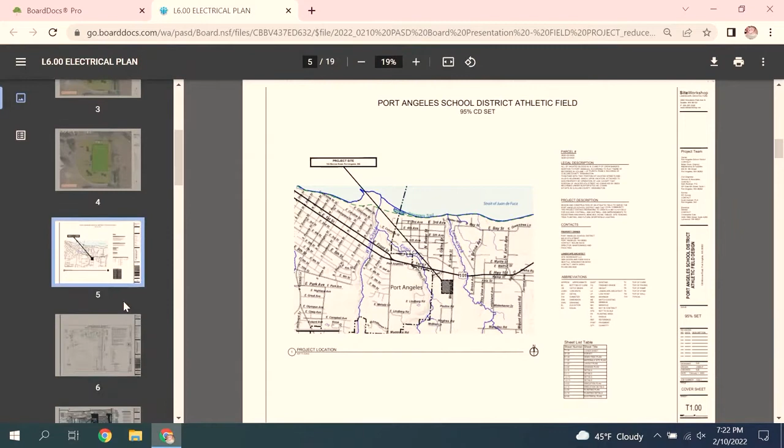The second page is the site survey. This survey was conducted by a firm local here to Port Angeles, NTI Survey, and we use this as the basis for developing our construction documents.

The third sheet in the set is the demolition plan. Just some elements I wanted to point out to you on this sheet is that the hatch area you see here with this diagonal hatch, this will be demolished. It's the existing and former Monroe School drop-off, but we are realigning the new walkway path in the same alignment within this to keep that historical arrangement on site. All of these existing trees that were part of that drop-off loop will be preserved and retained, as well as this existing historic Monroe School sidewalk leading up to that former drop-off loop.

Most of the other trees actually will be preserved as well, including that stand that's over by Roosevelt on the northwest corner of the site. There are 2 evergreen trees right here. I believe my mouse is following okay. These will be demolished just because they're at the edge of the new field. And there's another few small trees, but we are retaining a very significant deciduous tree that's planted in a prominent location on the site as well.

The ecology blocks you see out there, all the old remnants of utilities and things like that, will all be demoed and removed as a part of this site, and it's called out to do so on this plan. Around the portable building, the portable that you know exists out there will be retained, but the playground to the south of it will be removed, as will that small storage shed.

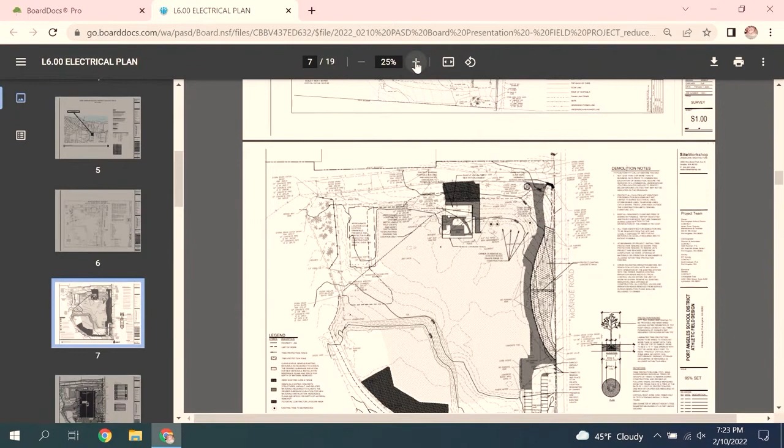And again, the diagonal hatch indicates what's removed, so some of the asphalt walk will be removed, but there will be asphalt retained to provide access to the ramp in the rear of the portable and to the stairs on the side of the portable.

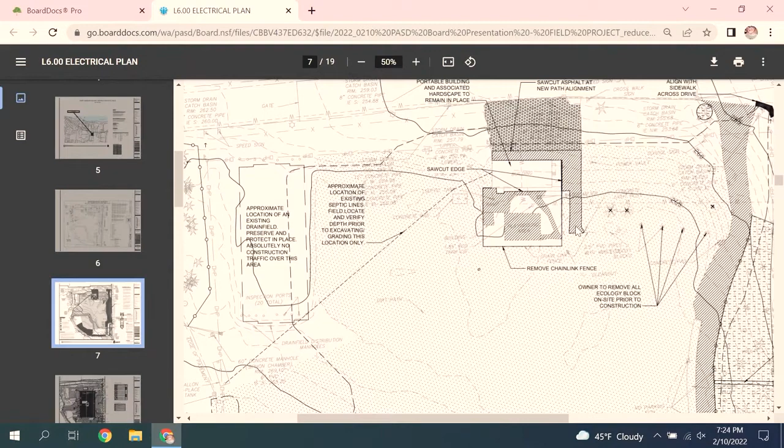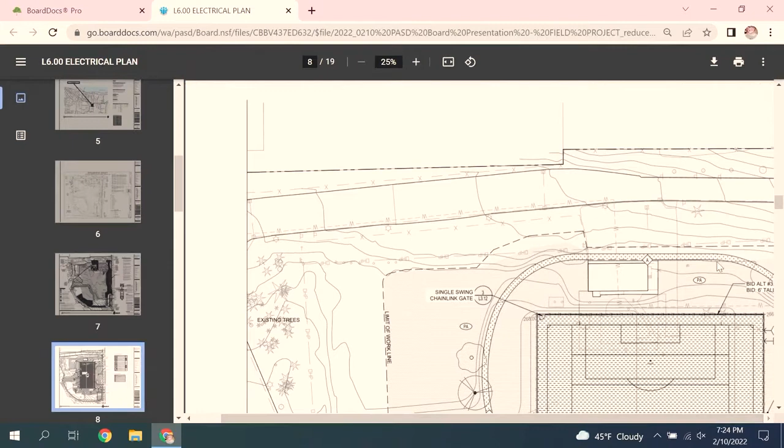The next sheet in the drawing set is the layout plan. And it just came on right there. A lot of this we had covered in the description of the plan, but in brief recap, the main elements are a full-size soccer football field, and you can see that in the center of the screen, kind of centered on the site and somewhat centered, as close as we could get, on the historical alignment of the former Monroe School. On the field, too, since the last meeting, we incorporated a logo that will be a part of the turf. It's the Port Angeles School logo, a large P and A.

I think these letters are about 20 feet tall, but laid horizontally down on the turf, integral to the turf. So the P and the A will be green with a white, thick outline around it. And it's oriented the way that you see it on the plan, so that it's easily viewed from the bleachers, which will be kind of the main viewing area, and also from this hillside informal amphitheater, kind of the right orientation to look down on the field and see the PA as well.

Beyond the field is this nice ADA accessible 6 foot wide asphalt walking path, and ADA accessible, so it does not exceed 5% slope in any part of the path, which makes it ideal for strollers and roller skates, and most importantly wheelchairs to traverse around the entire area. There's 3 locations of curb cuts or at-grade connections down to the street level, essentially right here with a tactile warning strip across from the existing sidewalk.

Over here on the south end, got a little bit of a lag, but on the south end as well, there will be a curb ramp, we call it, or a curb cut, and then also on the Roosevelt side, leading to that playground, there will be a curb cut as well. So it'll be fully accessible onto and off of and all the way around the walk. The bleacher area, we mentioned that location, and there's some areas of future development that I think I will cover in a subsequent sheet.

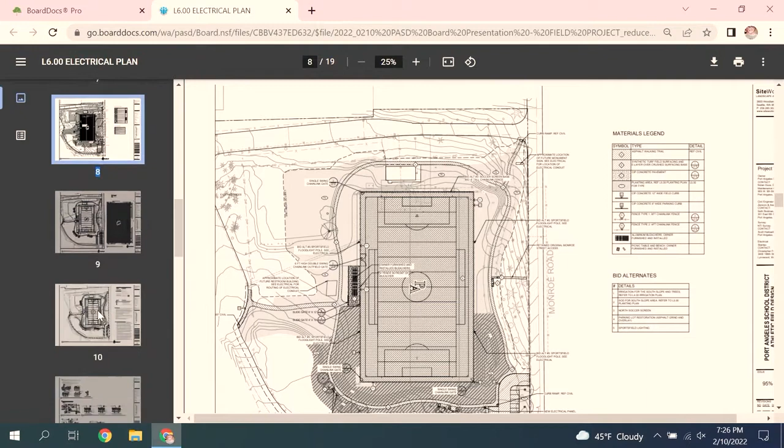And then the sheet that follows that one is the grading and drainage plan, and this will be a little bit more refined for the final bid set, but this is a good sheet to show kind of where the significant amount of grading occurs on site. One of the locations is this front entry. You kind of see all the darker contour lines on here. Those indicate how the path will be laid back to create that more gradual slope up. So there will be a little bit of a proud hill at this location as the path kind of cuts along and up into the site both ways.

There will be some grading between the soccer field and the portable building that's there now, some steeper grading, but it's still 3-to-1, perfectly mowable, but just to make it work and match up to the existing grades around the portable. That'll occur here. We mentioned the grading that gets pulled back to create this warm-up space area.

And then as we move south, the most extensive grading on site will be to remove this knoll that sticks out onto the field now in order to grade the field in, and then also create a park-like setting with a path that kind of comes about 5 foot up above the field and then drops back down to the parking lot on this side. And this will create kind of 2 different tiers of seating and viewing, again at a 3-to-1 slope, so easy enough to mow, comfortable enough to sit against, but to give you some elevation and some additional more natural-like seating around the field.

There's a little bit more grading we're showing here on the east side. We're going to have a lot of extra material left from this excavation, and the idea is maybe we can use some of it to create another berm, create almost like a full bowl on the other side. I mean, not quite, but it's a chance for some spectator elevated viewing on the east side of the field as well.

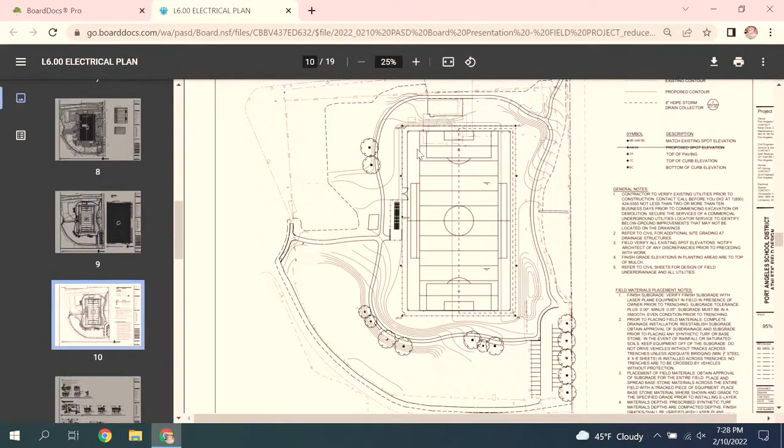And so that's nice. And just as a foolproof part of the system, we do have an overflow design that would connect into the city storm system in the event you would need it. But according to all of our engineering and modeling, it seems like that won't ever be the case. It will collect under the field and it will infiltrate straight down.

Okay, so then moving along to the detail sheets. Nearing completion, but a few we want to add. This sheet has details that show how the concrete will be installed on the site. There will be a detail for the asphalt path that's going to be added, and a detail for the base installations. That's one thing I maybe skipped briefly by, if I were to go look at the original plan that we're working on.

If I zoom in, this is a soccer football field, but it also has provisions, base paths for softball as well. So there will be anchor locations in the field so anyone using the field is able to install bases so that a softball practice could occur. There won't be striping for it in the outfield, but that's something that could be painted temporarily onto the field and then removed. And so that's what those details show right here. And then there are some details about the drainage system that will be further refined.

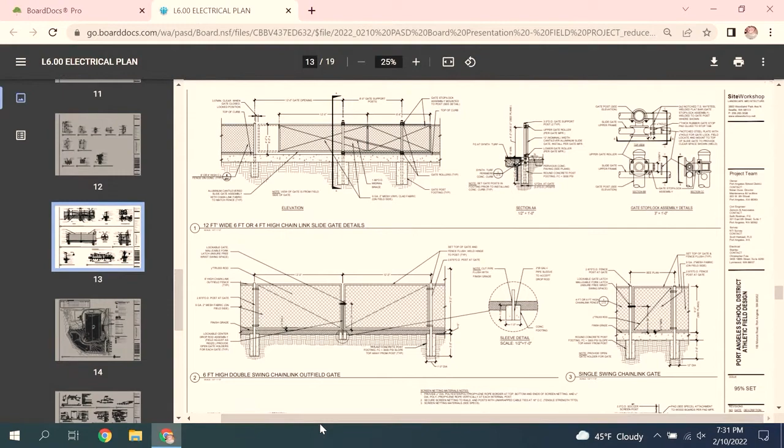2 nice cantilever slide gates as a part of the main entry onto the field, also a double swing gate for maintenance, and some pedestrian gates around the field that I believe we mentioned at the last meeting, but happy to point out where those would be as well. One thing I wanted to point out, something that's going to be bid as an alternate on this project, is the idea of a soccer screen. We'll have a 2-part alternate, one for the north side of the site and one for the south side.

A soccer screen is essentially a taller fence that will help contain errant soccer balls as people take shots on goal. You could say it's not as important on the south side because the balls would be kicked onto that slope and they'd roll back down. But on the north side, with the travel lane down below and the sloping that way, someone might have to chase a ball for a distance to retrieve it. So if we receive favorable bid prices, and this is something that the school district elects to award, this would be constructed similar to how you see it on the sheet.

So for the irrigation on the site, again, we're kind of trying to be clever about how we base bid items and alternate items. For the base bid, irrigation will include a water line service, an irrigation main line from the point of connection down around the south end of the field with quick coupler valves, so valves that you could connect a hose into at each location, at each corner of the field. So the main line will come down as part of the base bid. There'll be a quick coupler at this southeast location, then a quick coupler at the southwest, and also a quick coupler over by the bleachers.

So that way, district maintenance could irrigate trees by hand if they need to, or provide water for any sort of use. There will also be sleeves that district maintenance could expand the system on their own in the future under the pavement. The sleeves go under the pavement.

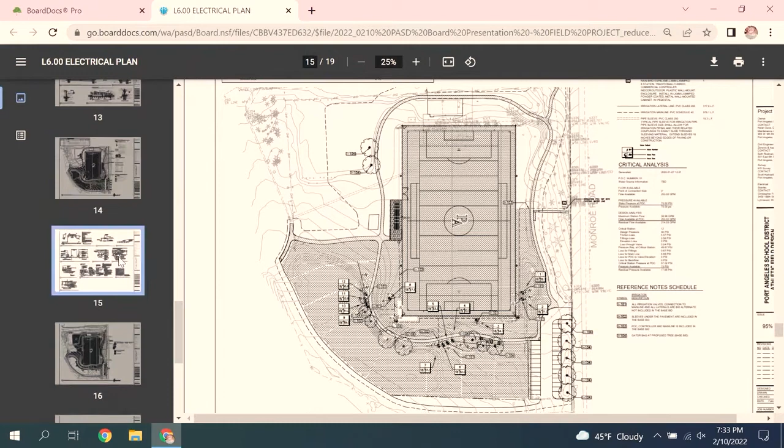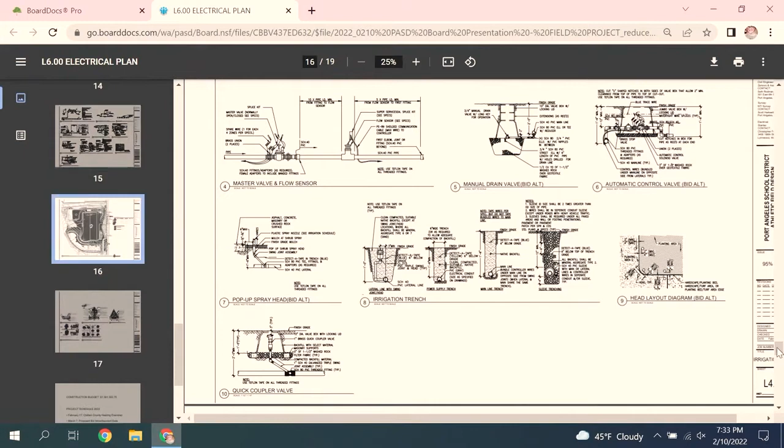The next page is some standard irrigation details, yet to be refined, but they'll be very similar to the elements you see on this sheet. And following that, the second to last sheet of the set is the planting plan. And for the planting plan, everywhere you see with the darker hatch is area that's affected by grading on site, either to create those contours or to create space for the field. And so that will all, as part of the base bid, be hydro-seeded with a grass seed.

And then another alternate that somewhat goes in tandem with the irrigation would be, instead of a hydro seed, to sod, and it might be discernible with the darker hatch on here, although they're fairly close looking, but the darker hatch would be a sod alternate. And so if that's awarded, instead of seeding this area, we would place sod so that it would be ready day one for spectators to sit on the side slopes. We thought as a group that it'd be a highly used area, these slopes, in the beginning, and it might be important to provide a little bit more of a durable surface at the onset.

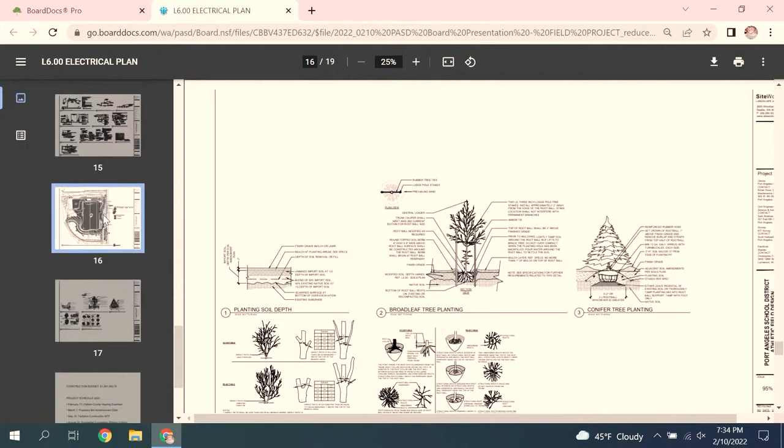And with the planting, there's also about 14 trees on the site. I think I can kick back to one slide. Some trees along the frontage of Monroe, which is a part of the county code requirements, as well as some trees along this path, which are getting lost a little bit in the, oh, there we go, in the hatch. But these kind of create some shade areas for people maybe sitting along here, but also creating some sun areas as well. And there's some pads for benches along there too that might be installed in the future. So that'll provide a shaded environment. Some standard planting details we'll refine before the final bid set.

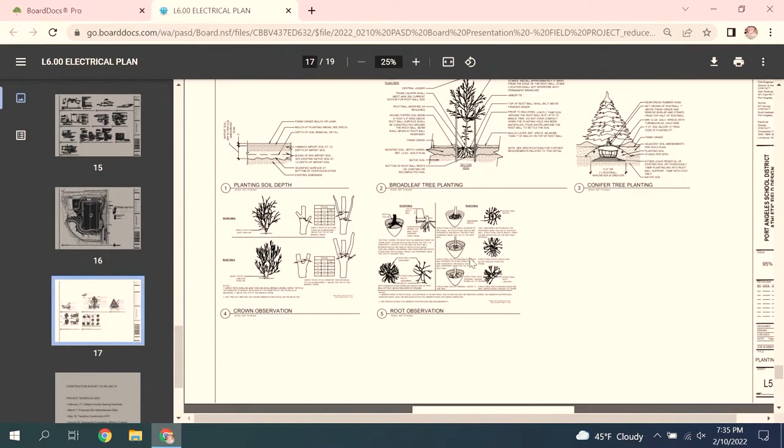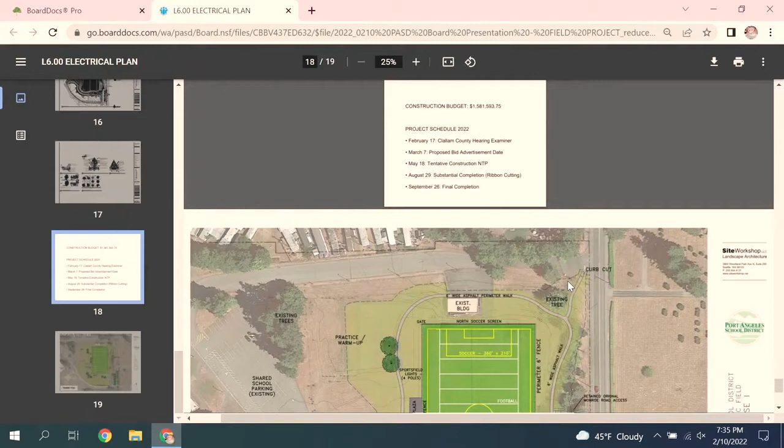And last sheet is the electrical site plan. And so on this sheet, we can see the location of the 4 sports field floodlight poles with LED lights. Those poles and lights are another bid alternate. Those will be awarded if funding allows, but a part of the base bid is the pathways underground to these lights, as well as the conduit to the future items, which include a restroom structure that would be in this location near the building, a proposed restroom structure. And so you'll have an electrical pathway to that.

It won't require any trenching to install that, as well as the proposed location of a future monument sign. There'll be an electrical conduit to that in case you would like to illuminate that at night. And then otherwise they'll be to the different light poles.

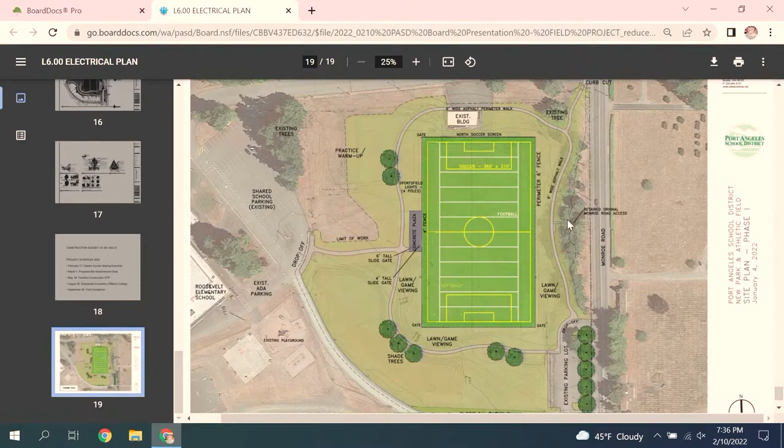There is an item that we are considering whether it will be a base bid or alternate item, still to be worked out with the group, and that is the location of this existing pad. Right here, this square is the pad for the electrical power to the parking lot and those 4 parking lot lights. And it's a great spot for the future electrical panel, which will need to be upgraded to accommodate the lights. We were going to just leave that as a base bid item,

and then as part of the alternate, to do that pad. The only issue, as you'll see in this crude markup I have over here, is that the pad is at a lower elevation than the rest of the site that we'd like to grade to. We'd like to develop the asphalt walk straight through here at about the elevation you can kind of see and avoid these steps. And with this pad here, that would necessitate us bringing it up during this construction period. And if we were to do that, we might as well upgrade the panel. So we are considering that as I move on to the budget sheet and tie into what I just said.

The existing construction budget for the project is $1.581 million, as you see listed here. The great news is that our estimate of probable construction costs are right about in line with this, or maybe around $20,000 over, that we're still kind of working with and could probably value engineer if we need to. But that electrical work, that wasn't something we were originally considering, is something that could factor in as being further overage above this. So it's something to further talk about, but on the whole, we're in line with where we were targeting from the very beginning of the project.

To talk briefly about the project schedule, we're here on the 10th presenting, and then next week on February 17th, we will be in front of the Clallam County Hearing Examiner receiving some comments that we've already had preview to, things to be expected, a review of our drainage plan they would like to take a look at, and the lighting plan as well, but very standard things, and hopefully that review time frame only takes about a couple weeks after that date. And then March 7th is a tentative bid advertisement date, depending on how our comments are incorporated and if there's anything else to coordinate with the school district.

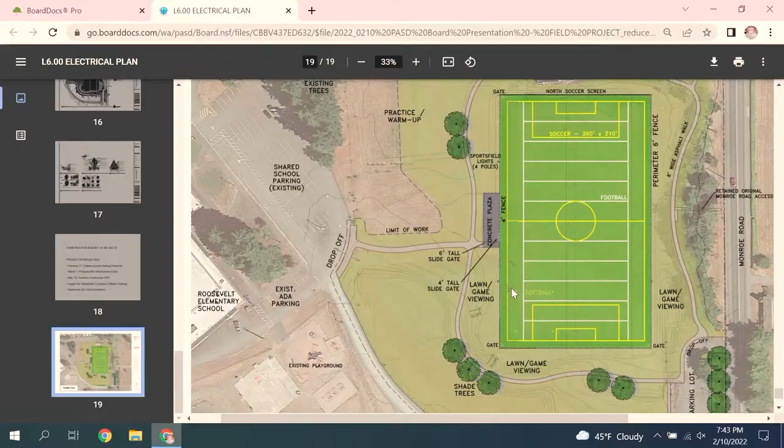Could you please give me some more detail about the restroom in that location? Yes. So, let's see, the best one is if I were to go and click on this one page. I think there's a footprint of it. So the idea with the restroom in this location was to site something in relatively close proximity to the primary parking area as well as the bleachers. And this site seemed to make the most sense. It's relatively flat, right behind the bleachers. It's not on this slope area, and it's not too far of a distance walk from the parking lot. And it's also on your way into and out of the sporting event.

This is another drop-off area on this side with a curb and the asphalt walk. This is a widened walk, about 8 foot wide. It's the only 8 foot wide walk on the site. The rest are all 6 foot wide. And so it creates a little bit more of an entry promenade, but it was also designed to accommodate vehicular movement into the site if there needed to be an ambulance or another vehicle that travels out onto the field. And so all those reasons pointed to this location being ideal.

And also by locating it here, we brought conduit all the way to this point. So if there was a desire to place it somewhere else, say south of that in the future, it could be along the conduit path as well. By bringing it out to this location, it ran longer conduit through the site, so it gave you more options if there was a desire to site it elsewhere in the future. And so the bleachers, what's the number of people that we're looking at with that size?